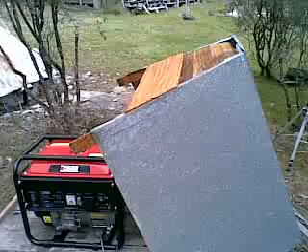Before we get to the generator, I've added a fifth leg to the hutch, which replaces and supersedes the idea of having this earth stake, since it's moved from where it used to be. That's where the earth stake used to be, and now the generator is accessible with this fifth leg supporting the hutch.

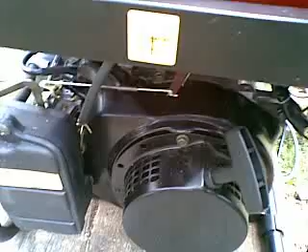So while I'm here, I might as well give you a bit of an update on the generator. It's now done about 75 hours.

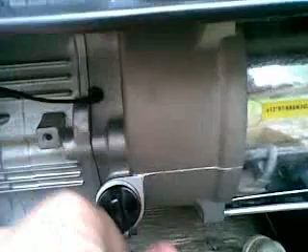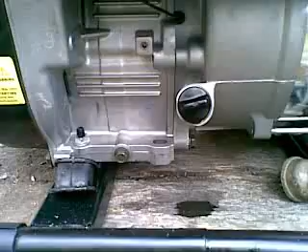I changed the oil again at the 50-hour mark, and once again I got a bit of silvery looking metal in the oil that came out of it. However, that's looking quite clean, and that's now done 25 hours. So I'm not as worried now as I was when I first saw silvery metallic magnetic oil come out at the 20-hour mark.

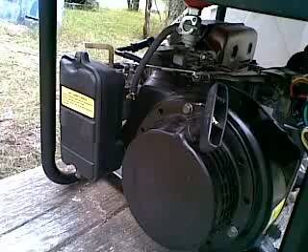Now this is what the oil looks like when it goes into the generator. This is the oil which I drained from the generator at 20 hours, and it's the one which has ferrous metallic filings, which are extremely attracted to the magnet.

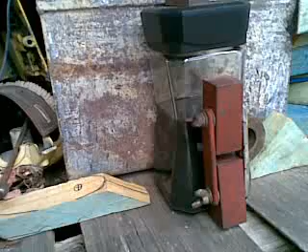Not so much coming into the field of that one, but yeah, what's been happening is the sun on the oil has been setting up a convection driven thermal flow, moving the oil past the magnetic field, and I'm pretty sure there's some sedimentation on the bottom. There we go. Lots of sludge.

Now the oil which came out at 50 hours, so it had only done 30 hours, was cleaner, but it wasn't as clean, yet it has very much less sludge on the bottom. I haven't tried it for its magnetic properties yet.

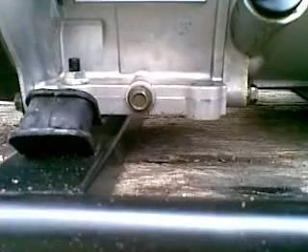No doubt you'll notice that the 20-hour oil change left about a teacup full of dirty, sludgy, magnetic particle-filled oil in the crankcase, which was my mistake. I had not realised that the sump drain plug was so far above the bottom of the sump.

But yeah, in an absolutely dead level position, that will leave a teacup full of old oil in the bottom of the sump. So the answer is roll the generator 45 degrees in the direction of the sump plug when you go to drain it.

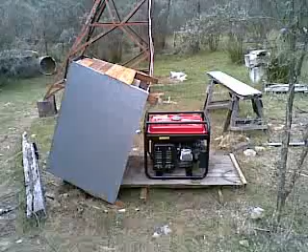It's going to be good practice on any oil change, but I'm sort of kicking myself for not having thought of it earlier, because it means that I've run this thing for 50 hours instead of 20 hours with some metal fragments in the oil.

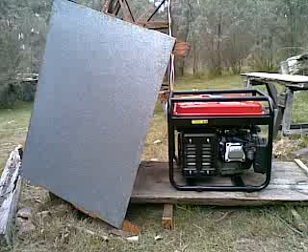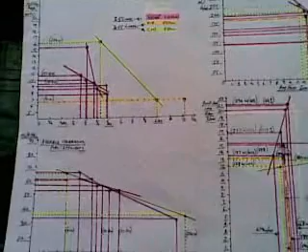And it does make a bit of a difference to the fuel consumption. Actually, I found it's been quite interesting to see the effect of the oil change on the fuel consumption.

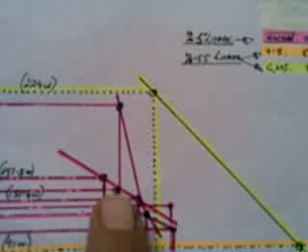Up the side we have the average output while burning 2.5 litres through the Exceed in the pink traces, and this line along here is pretty much the fuel consumption curve with 5 hours, 4 3/4, 4 1/2, 4 1/4, 4 hours. So it's sort of how long you get how much power. And after the oil change, we're on this curve.

Now, 8 amps is having the generator running the lights and the radio in the hut plus the battery charger. 15 or 16 amps, you've got the television on instead of the radio, you've got 2 lights on instead of 1, and you've got the swimming pool filter on.

The yellow fuel burn response was the GMC 850 watt 2-stroke generator. The orange response was the X5 El Cheapo copy.

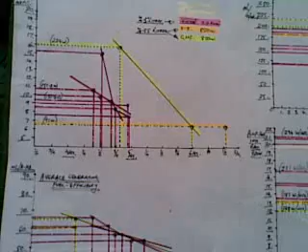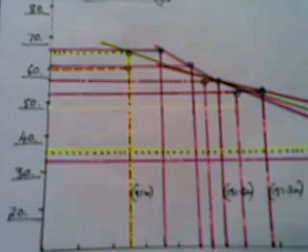And if we come down to the average generating fuel efficiency, if you've got 6.5, 7.5 amps of output, you might have to burn 60-65 mils of fuel per amp hour. If you can crank it up to 15 or 16 amps of output, things get better, down to 33 or 36 mils of fuel per amp hour.

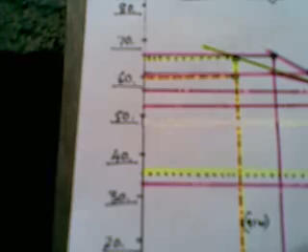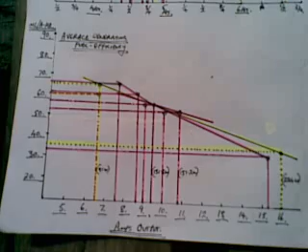What's going on here is that both generators are not loaded up enough, just running a couple of high efficiency light bulbs, a radio and a battery charger. They're not loaded up enough to get into their most efficient power band, and it's particularly bad with the 4-stroke, which is theoretically much more efficient.

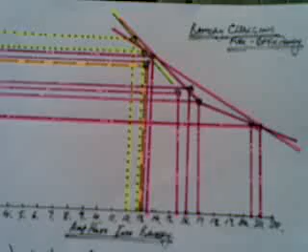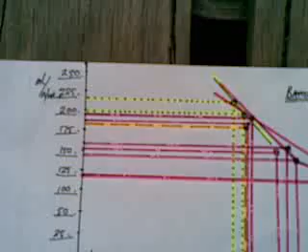Now, here we have amp hours going into the battery over the course of the night from 12 to 21, and over here we have how many mils of fuel per amp hour going into the battery, and we're looking at 121 mils per amp hour for the best night, and that was with the 4-stroke generator loaded up after 3 rainy days when the batteries were pretty sad and flat. At worst, we're talking 225 mils of fuel per amp hour into the battery, and that's with the 2-stroke generator, not making much power but running for quite a long while.

Now 220 mils per amp hour, that's about equivalent to my Subaru 1.8 litre 4-wheel drive station wagon at battery charging.

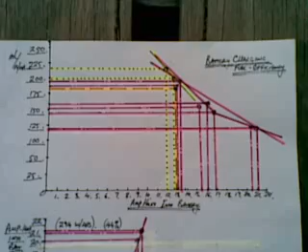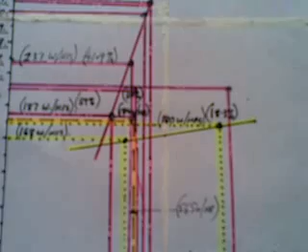Amp hours equivalent on 2.5 litres of fuel, from 35 to 75 amp hours out of the same 2.5 litres of fuel, giving between 12 and 21 amp hours going into the battery.

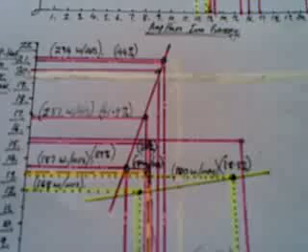So the answer to the question, which is more efficient, a small 2-stroke generator or a kind of small middle-sized 4-stroke generator? For my purposes, they're about the same, although the 4-stroke generator gets the same job done in less time.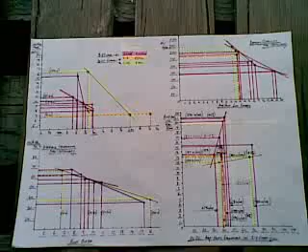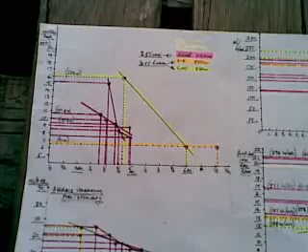So if you really wanted to watch the television for 6 hours on 2.5 litres while charging the battery, you'd have to say the 2-stroke El Cheapo from China will get you more hours watching television on the same amount of fuel. But it's a 2-stroke, so it's going to put more pollution into the air.

And yeah, those graphs are based on more or less meticulous record keeping, because I like knowing what's actually going on. And if you can't measure it, you can't manage it.

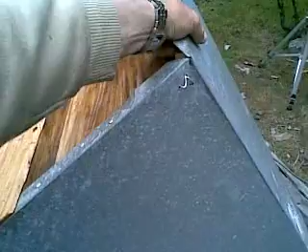And just as a final flourish, because everything should have many purposes, I don't know if we've got enough sun in the sky to demonstrate, but the 5th leg is the gnomon on a sundial that tells local apparent time.

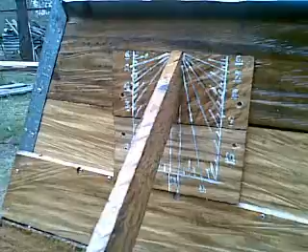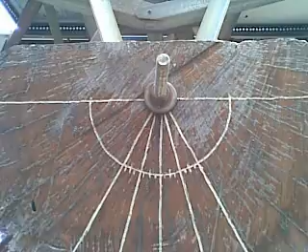Which is much more useful to me than it is to most people, because the sundial on the Tower of Power tells me how well the array is aligned with where the sun is in the sky, whereas the north vertical sundial on the generator hut tells me what time it actually is.

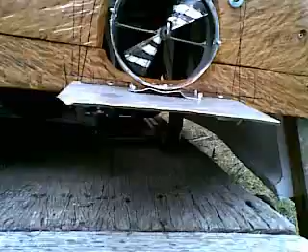So I think I may have just about finished the evolution of the elegant minimalist generator shed, at least until I actually hook a generator onto a fan in a new duct one of these days when I'm feeling particularly bored. But anyway, that's a chainsaw milled sundial.

And one day when we've got some sun in the sky to replace the clouds, I might give a bit of a demonstration of the only kind of sundial which actually runs clockwise in the southern hemisphere.